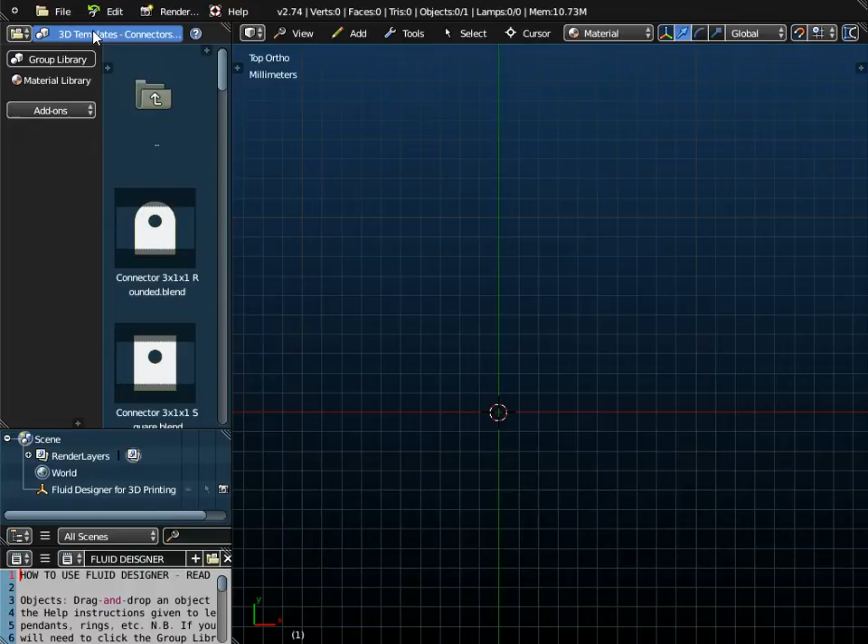We're going to use a number of different objects. First of all, in 3D templates connectors, we're going to use this wire connector here with a 1.5mm diameter hole. That's for the fish hook to go through.

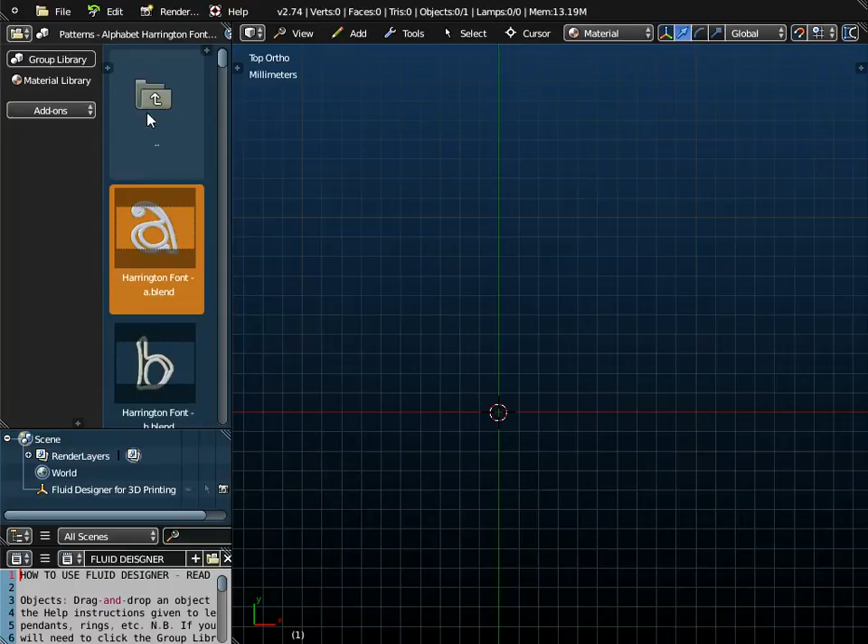We're going to use a Harrington font. There are other fonts available, but I'm going to just add a letter A, lowercase letter A, from the Harrington fonts folder. And we're going to use a leaf pattern.

If I go to the patterns leaf folder, there are a number of different types of leaf and a number of different patterns. So apple, for example, we've got 1, 2, 3, 4, 5 different objects there. We've got 3 that are just 2D, one that's empty, one that's completely full, and then we've got a couple of 3D leaves as well.

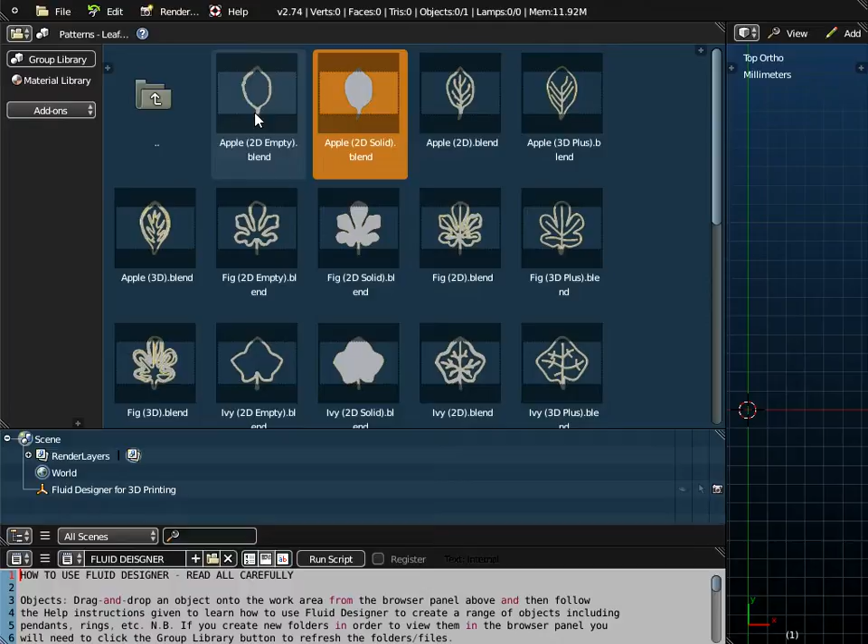Now these work in slightly different ways. These two, the 3D ones, are parametric smart objects. The 2D ones, you have to be a little bit more careful about setting the thickness of them.

In this video, I'm going to work with the Teak one, and I'm going to use one of the 3D options. This is the more straight version, this is a more rounded version, and I'm just going to drag and drop that object onto the workspace.

Now the first thing to notice about this in terms of it being an earring is that it's quite long. It's 39mm long. Now this is a parametric smart object.

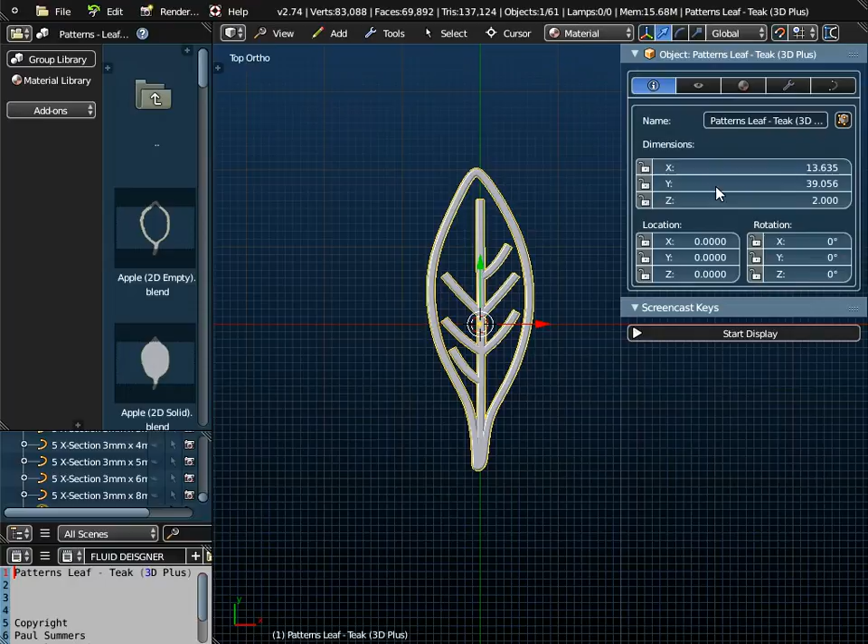I'll just switch on screencast keys, so key presses should be displayed down here. We can, if we go to the curve properties, change the thickness of this. We can make it deeper. But because this is going to be an earring, I'm actually going to reduce it to 1mm by 1mm, so it's 1mm across, 1mm down.

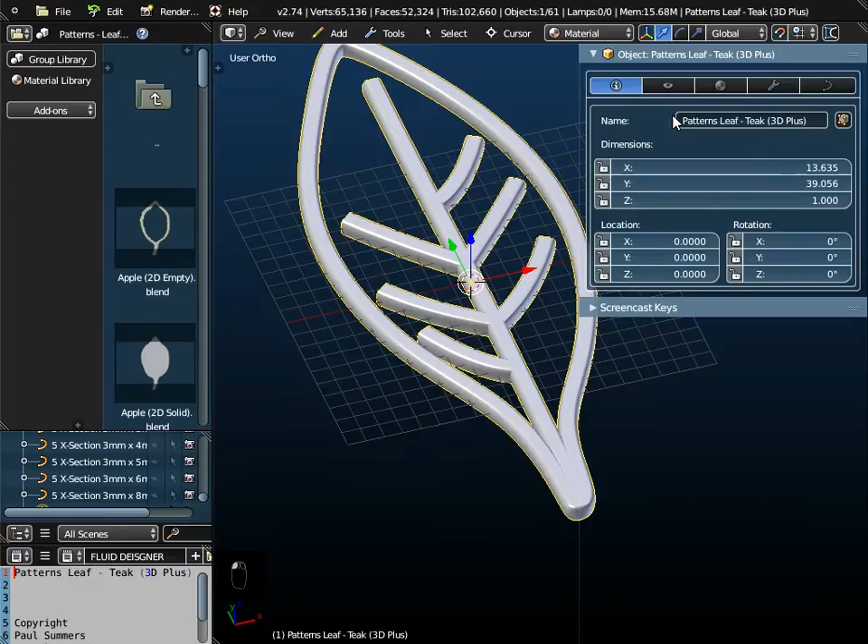But also, as we notice over here, it's 39mm long, and that's quite long. So I'm going to actually reduce the size of that. I'm going to do S on the keyboard for scale, and then move the arrow key towards the center of the screen, and I can see now over here that the length of it is down to 23mm.

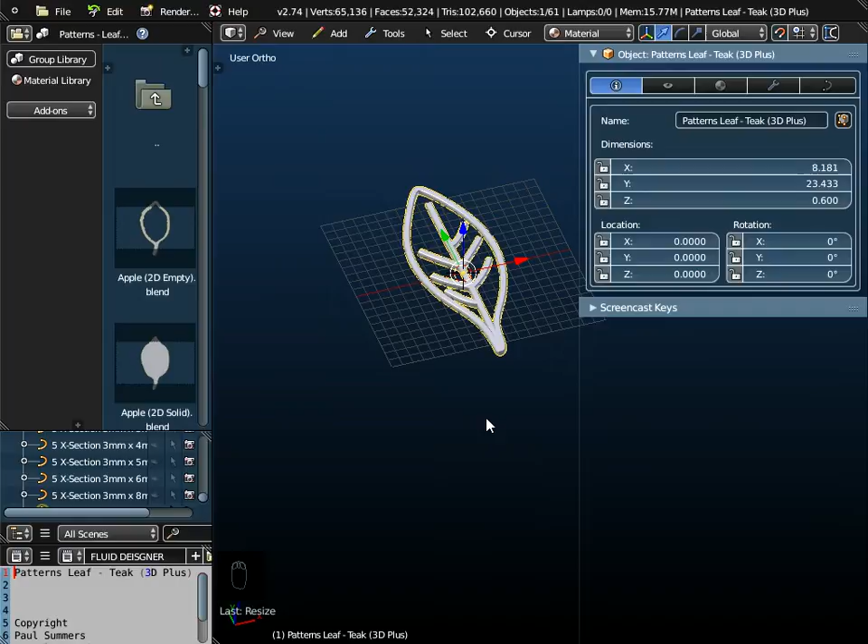Now whenever you scale 3D objects in Fluid Designer, parametric smart objects, you must always do Control A and apply the scale, and watch the thickness reapply. If you don't do that, this cross section will no longer be correct. So that's the first thing I'm going to do, just make it a little bit smaller.

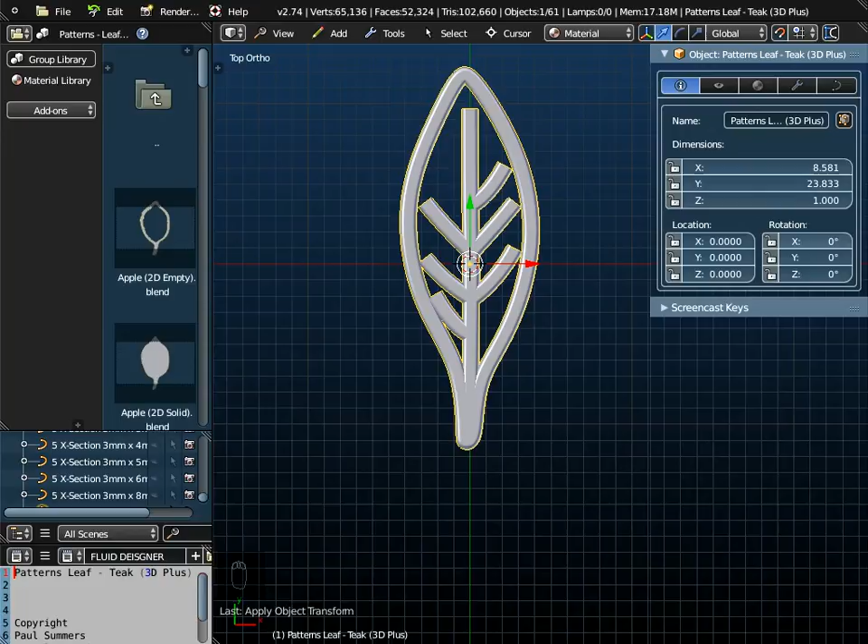Now I want to put the leaf the other way around, so what I could do is, this is the x-axis, so if I rotate it 180 degrees about the x-axis, I can do that in the properties panel here. That will flip it over like that for me, and I can put the connector at the top, and personalise it at the bottom with the letter A as per the original rendered image.

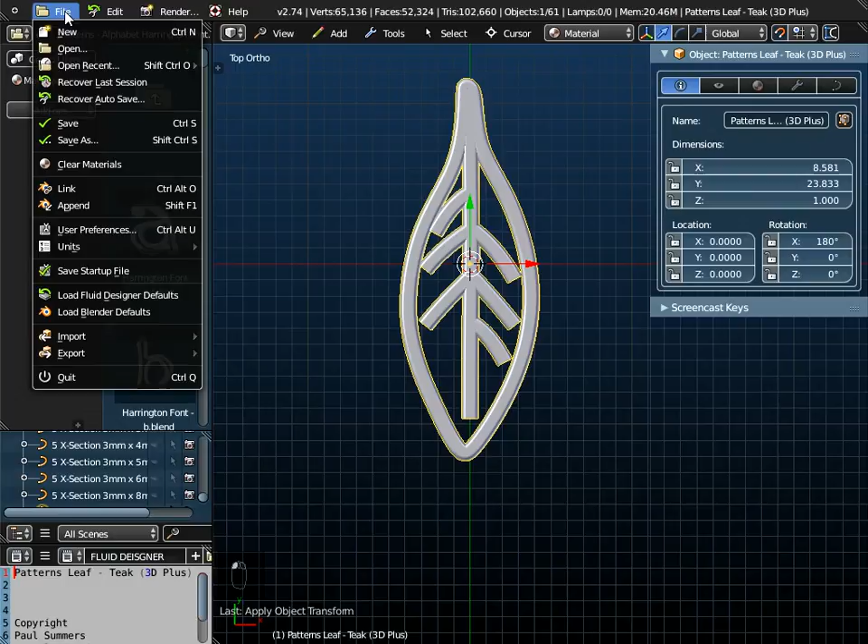So now what I'm going to do is add an alphabet Harrington font. I'm going to add this letter A here, and that's in the patterns alphabet Harrington font folder. So I need to go to File and Append.

Just go up through the menu system until you get to the Groups folder. I'm going to use alphabet Harrington font, and I'm going to personalise it by using letter A, and add that from the library. When you first bring it in, it's not actually selected.

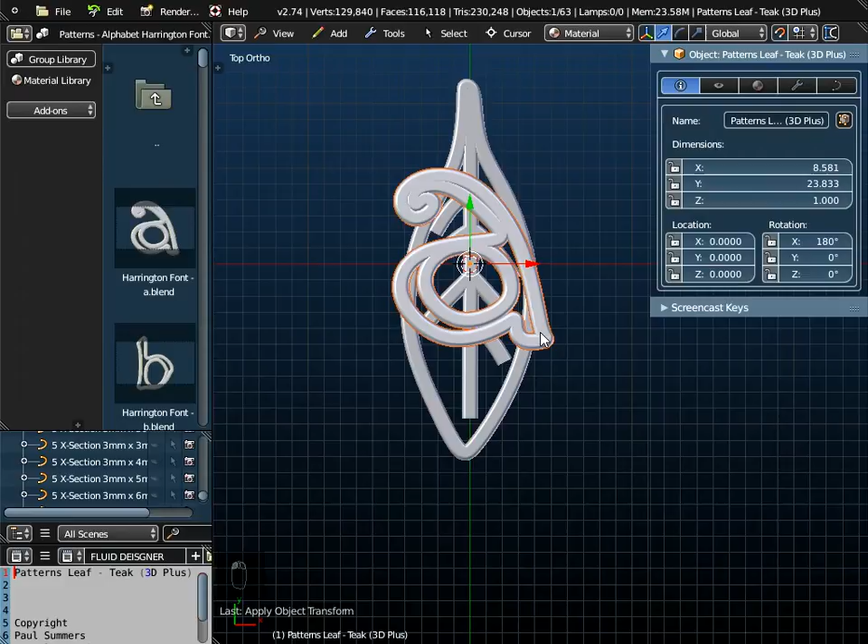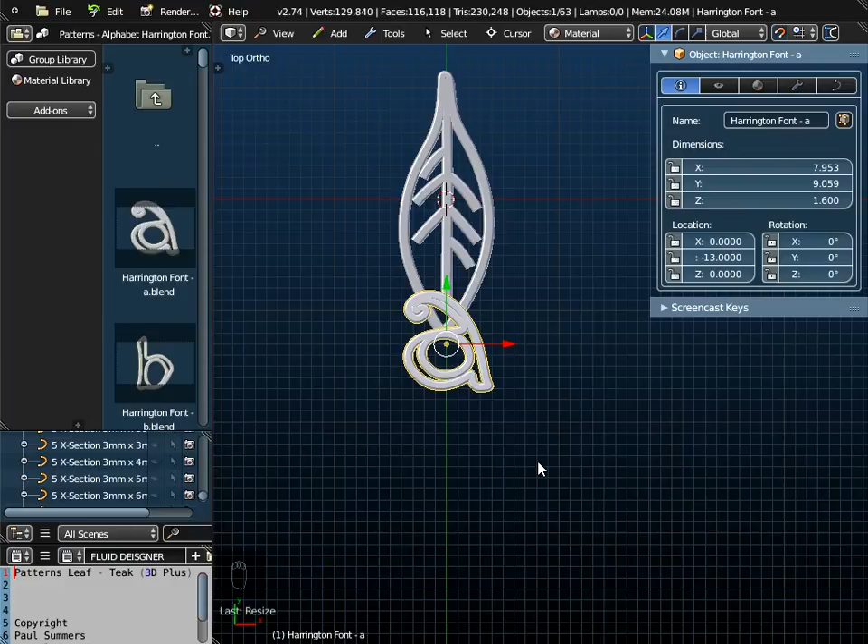You have to click on it till it goes yellow borderline, and I'm just going to reposition that, and you can put it wherever you want. I'm going to scale that one down as well, so I'm going to do S on the keyboard. I'm just going to scale it twice and do Control A and apply the scale. That just makes it a little bit smaller.

Now you can see here that the thickness of this object, the default, most of our default thicknesses are 1 by 1. So this is 2mm deep, but that's not a problem.

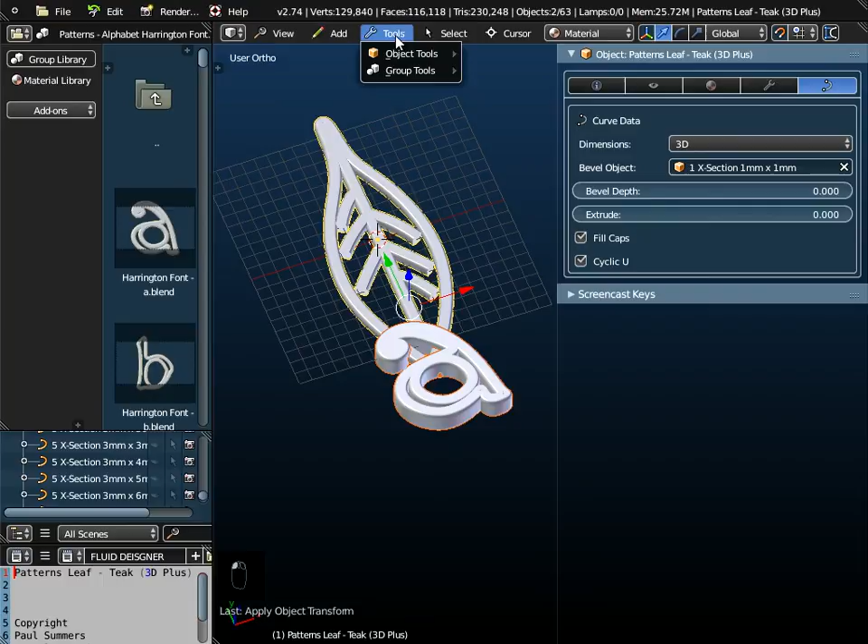If I hold down the Shift key and highlight the leaf, and go to Tools, Object Tools, and Join, when I join them together, the A takes on the properties of the leaf, and the A is now also 1mm by 1mm.

So the only thing I need to do now is to add a ring, a connector at the top, and that's in 3D Templates Connectors. As I showed you before, I'm going to use this wire connector with a 1.5mm diameter hole.

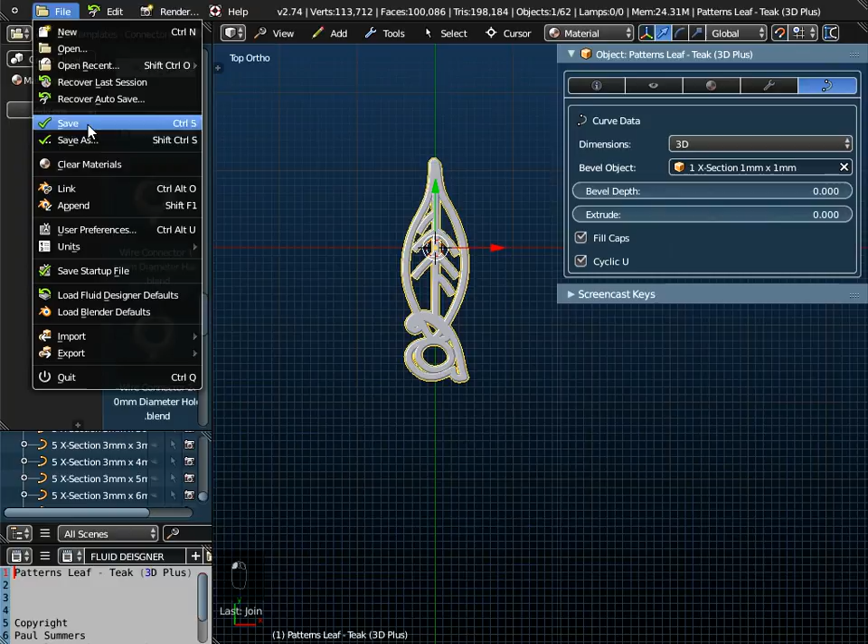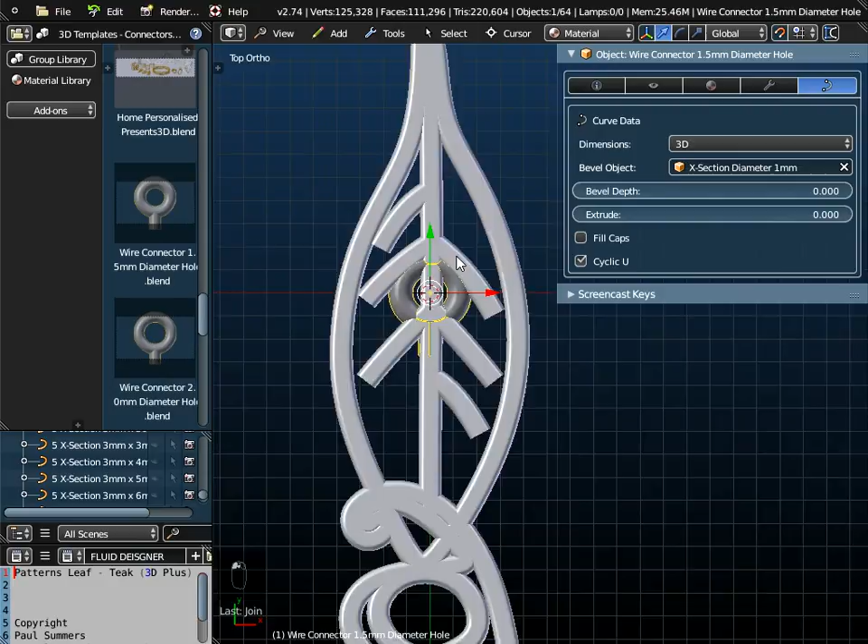So we just go to File and Append, go up through the menu system until you get to the Groups folder, go to 3D Templates Connectors. I'm going to use the wire connector with a 1.5mm diameter hole, and append that object from the library. If I just zoom in by scrolling the center mouse button, I can pull that object up to the top there and point at it and zoom in, and fine tune it when the grid changes.

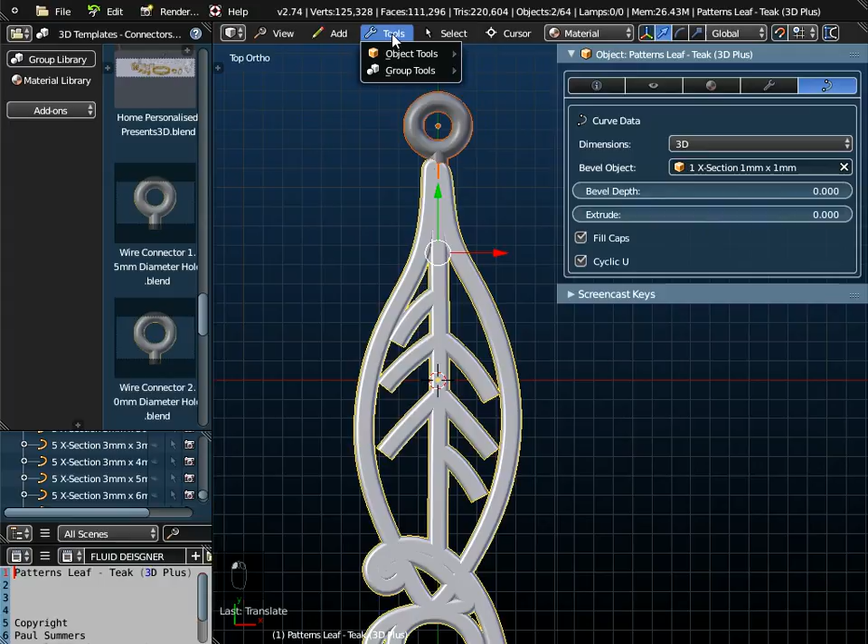So I'm going to leave it there, and I want to join this object now to the leaf and the letter A, so I'll hold down the Shift key, highlight the leaf, go to Tools, Object Tools and Join, and notice that the connector takes on the same cross section, the 1x1 cross section, as the rest of the object. And that's how easy it is to create this personalised leaf earring.

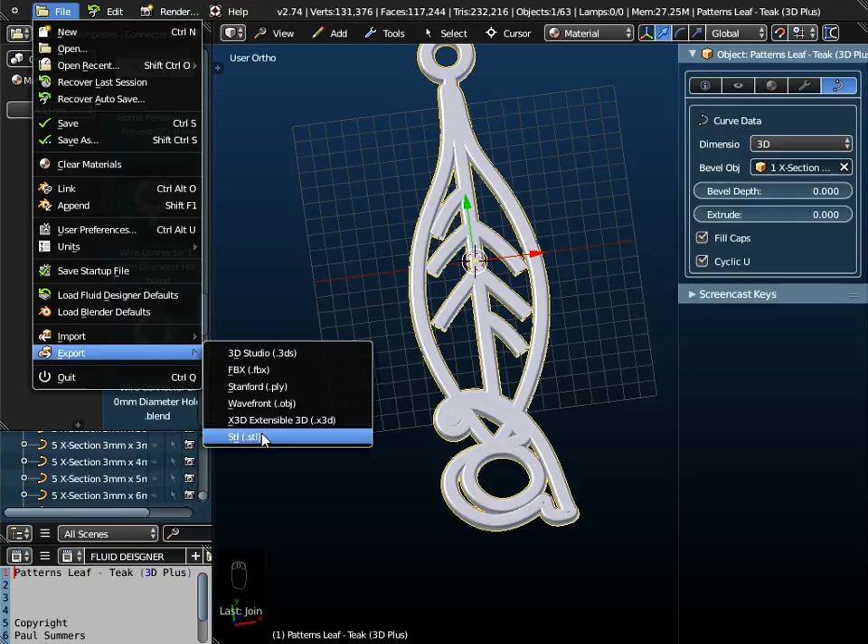So what we would do now is export it, as I tend to use Wavefront OBJ, but you could use STL. I save this as a personalised teak leaf earring, and what you must then do is go to netfabb Basic.

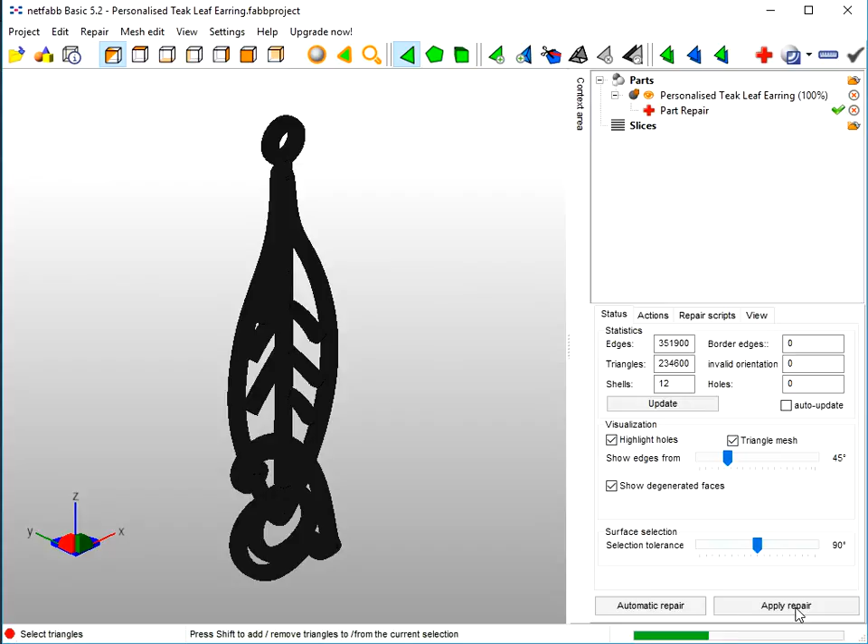So here it is in netfabb Basic, and run the repair procedure in netfabb Basic, and run automatic repair and execute. I have obviously already done this, but this is what you need to do: apply, repair and remove the old part.

And then you just go to Part, export the part as a Wavefront object, as a personalised teak leaf earring. And that's it. That's your file that you can upload to Shapeways or send to your slicer.